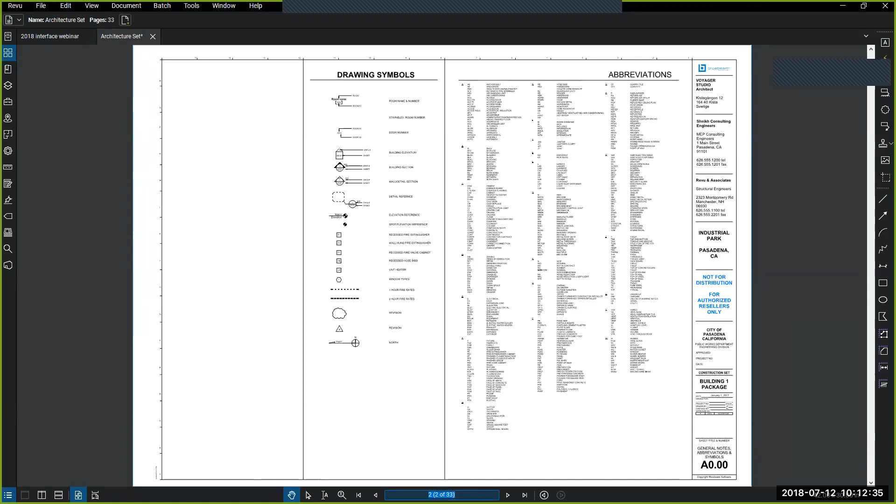And I'll go back to page 5 by clicking in the middle of the page field and hit the number 5 and hit enter. And not only does it tell me what page I'm on, but it also tells me how many pages there are total in the document. The left and right arrow buttons here allow me to go to a previous page or next page.

And this button here, this is kind of an interesting button that not a lot of people know about. By clicking on this button, this will take you back to the last thing that you are looking at. So this is very useful if you have hyperlinks in your document and you want to navigate to the last thing you clicked from after you made your hyperlink jump. Just look for the previous view button and it will take you to the last thing that you were looking at.

Now, this is not too different from the earlier version, 2017, but I wanted to throw this in there because not a lot of people use the navigation bar. And I just want to point out that it is another bar as part of our bar navigation overview.

Now I'm going to move on over here to the panel bar. Now what's the panel bar? The panel bar is a new feature in 2018. And if you're a longtime Bluebeam Revu user, you probably know that there used to be a big orange upside down triangle in the upper left representing a drop-down menu that would allow us to select side panels like our thumbnails or our bookmarks. And so there is no more big orange triangle in the upper left.

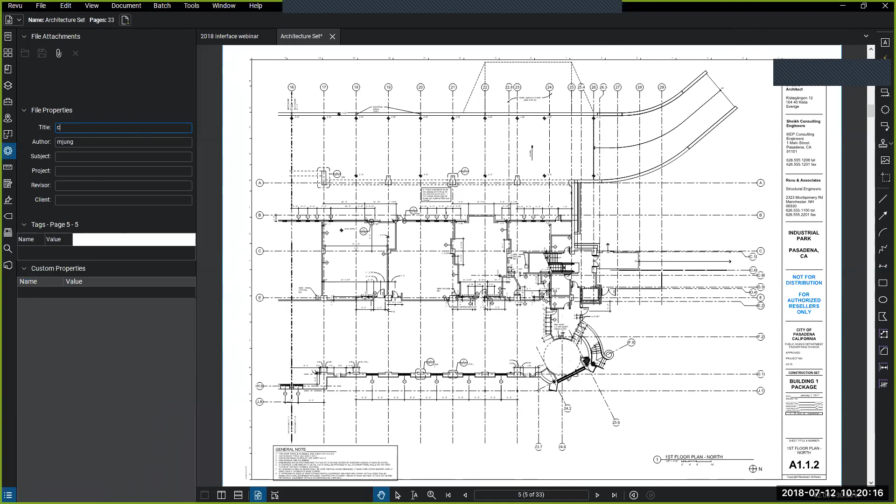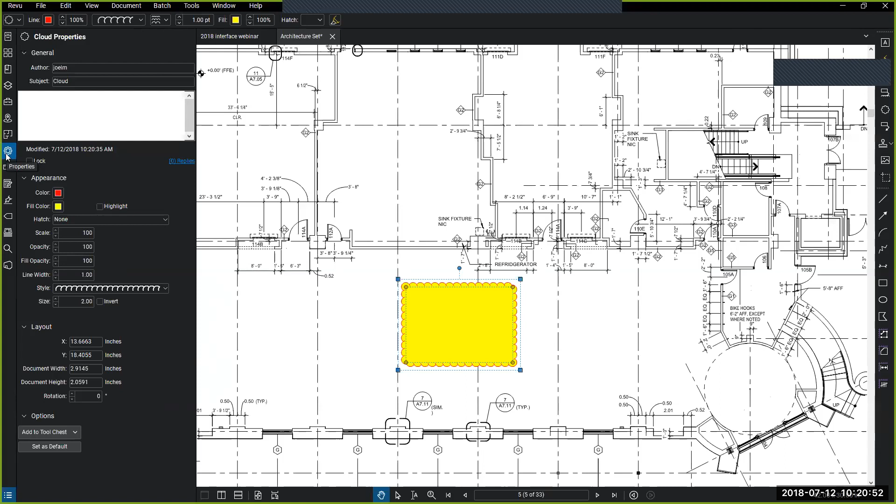And this is actually a very useful panel because it allows us to control the properties of certain things like our markups. So when I select the markup on page, the properties panel appears, allowing me to change its properties. And this is a very useful thing to have, but as you can see, it takes up a whole lot of space over here. So instead of using the properties panel that takes up so much space, we can use the properties bar, and that's what we see up here at the very top.

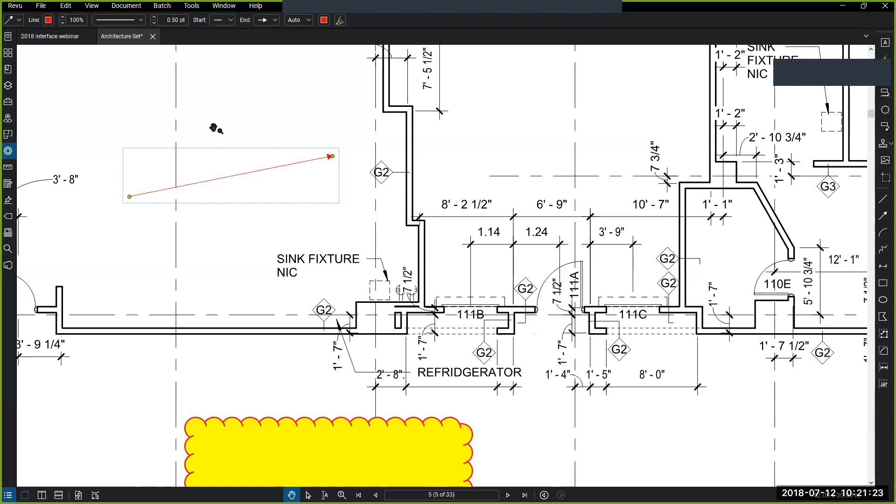So let me start out with another markup, something really simple like the arrow tool. So if I click on the arrow tool and apply an arrow to the page, I can see that when it is selected, my properties bar dynamically changes to give me the most pertinent properties that I can use to change the arrow. So if I want it to be thicker, I can just go up here and make it a little thicker like so. If I want to give it a different color, I can do that as well.

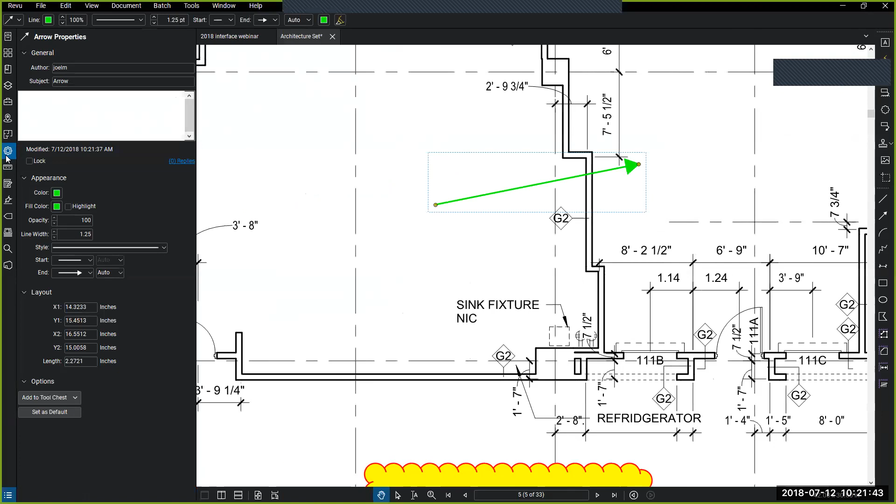So these are all features that I would normally have to modify by going to the properties panel and changing these features over here. But as we can see, by closing down the properties panel, we now have a lot more room. Now, again, the properties bar changes dynamically based on the selection. So right now I have arrow properties selected, but if I choose this cloud that I created earlier, I'll click on it, and now I have cloud properties.

If I deselect all of these features by clicking in the background, now I have properties that are related to the page or the document itself. So I can look here in the properties bar, and it tells me that there are 33 pages in this document. Here's the name of the document. If I want to add a blank page after this current page, I can click on this button. And you'll also notice that there's a pull-down menu right here on the far left of the properties bar. And by clicking on it, it shows me what the document's properties are.

Now, similarly, if I click on the arrow tool and look at that pull-down menu, you can see that the icon that represents that menu has also changed. And by clicking on it, it allows me to change the general properties of the markup. So in other words, I can change its subject property instead of having to go to my properties tab and changing the properties from the properties panel.

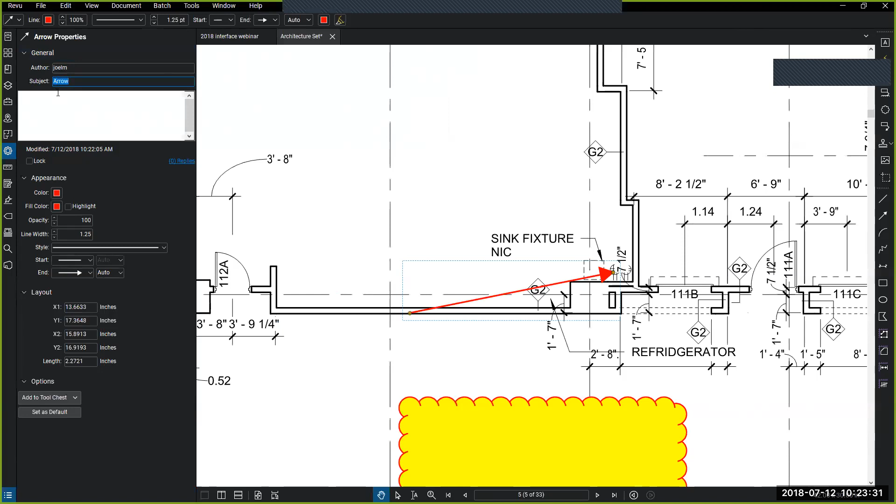Furthermore, once I change the properties to have it be something that I want to use going forward, so I'll change this to a green arrow, and then I'll go down to the pull-down menu. I can even assign it to a particular layer, or by setting it as the default, every time I use the arrow tool, it will retain those properties. Or I can even assign it to an existing tool chest or tool set that I've created from before. So these are really quick ways to add tools that you modify on the fly to a tool chest.

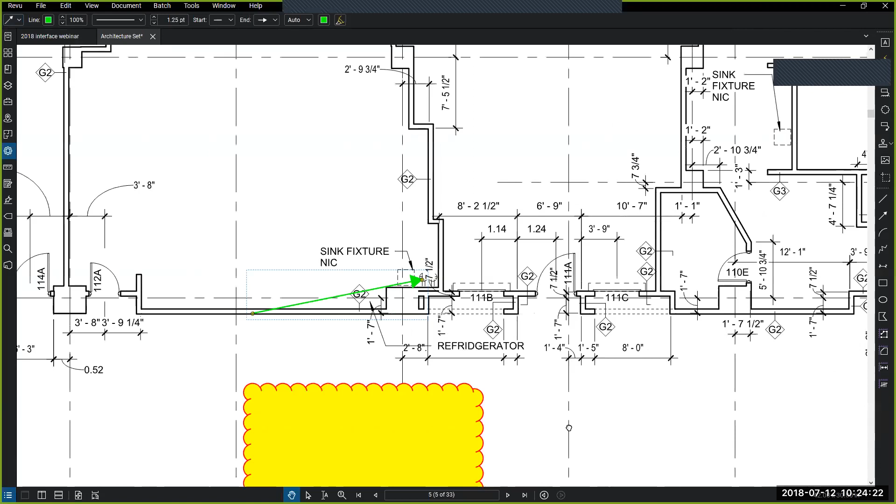Now let's take a look at this cloud tool. You can see how distinct it is from the arrow tool. We now have fill options that we can apply, so I can modify the inside of it, change its color, even change the opacity of this markup so we can see through the fill, or apply a hatch pattern to it.

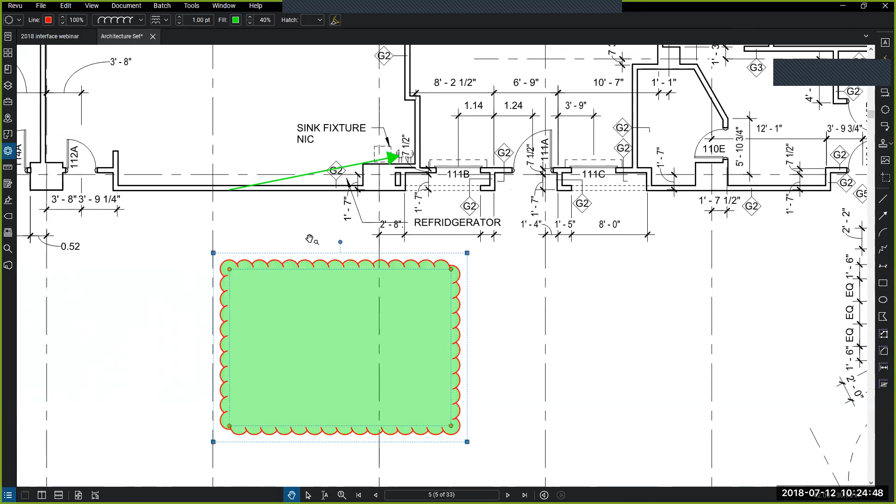Now, if I choose a different tool, something that has many more properties, an example of that would be the Cloud tool, or the Cloud Plus tool. So I'm going to choose the Cloud Plus tool right now, apply a cloud, and then position my text.

And there I have the Cloud Plus tool. You can see that the properties bar expands because ordinarily, if we want to modify the properties of a Cloud Plus tool, we go to the Properties panel, and we can see that we can modify the cloud separately from the text or callout portion of the tool.

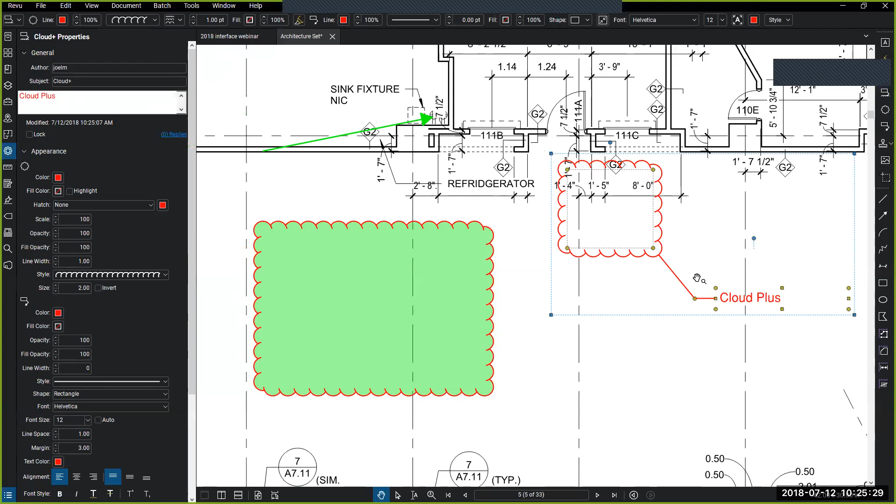Now let me close down the Properties panel, and you can see that we can do the same thing here. We can modify the cloud separately from the callout. So there's my cloud, and I haven't modified the callout yet.

I'm going to now assign a fill color to it separately from the cloud itself. So all of these things we can do from the Properties bar, and again, it just dynamically changes based on the tool that you have selected. So I prefer using this to the Properties panel for most of my property changes.

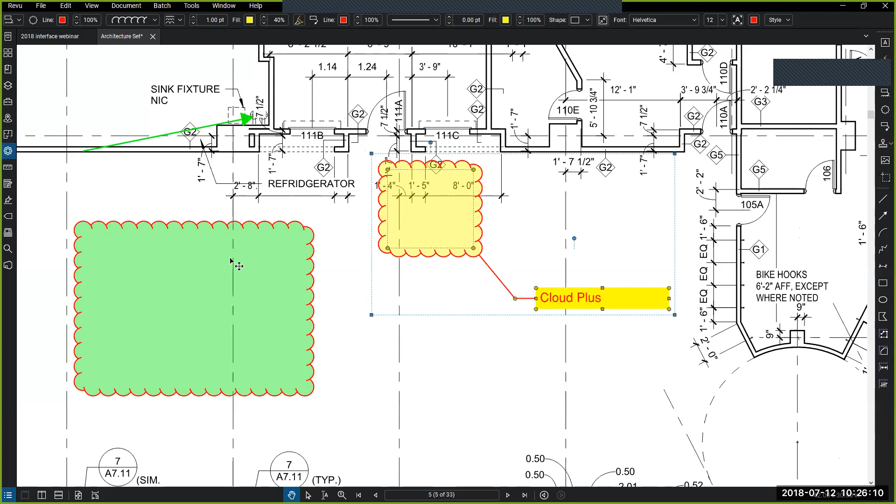And this is one of the significant new features that are in 2018, applying a Properties bar to a small sliver of the page, which still leaves us with a lot of room to operate in.

I'm going to show you one more thing here. Some of you may not know this particular feature, but I'm going to introduce it to you right now to prove another point about the Properties bar. If we open up by going to the window menu, if we go to the Web tab option here, this opens up a website or a web browser within Bluebeam Revu.

Now, this is one of those hidden features in the program that not a lot of people know about, but if you open up a web tab, it opens a web browser that just occupies another tab right here on your list of documents that you currently have open.

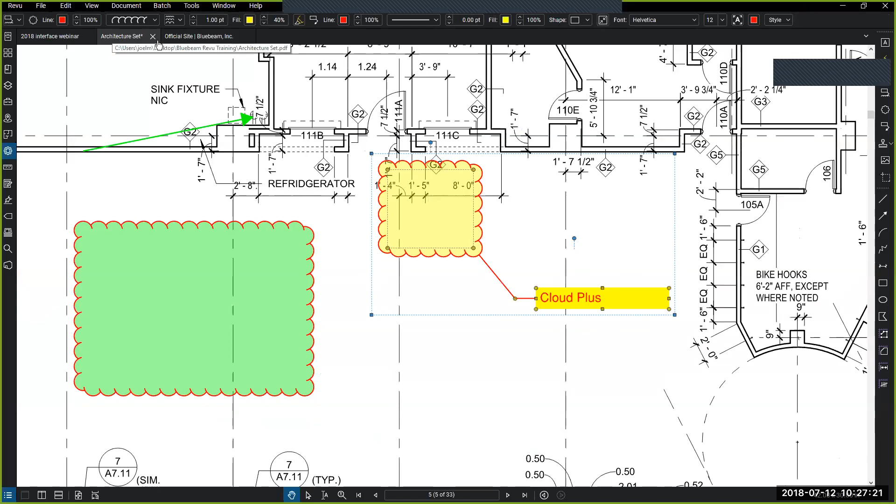So if I want to go back to my architecture file, I can click on it, but if I want to go to the web tab, I can click on that. Now, since this is a web page, you might be wondering, how do you navigate to a page that you want to go to? For that, you look up here at the Properties bar, and this is another example of the Properties bar changing dynamically based on what you have selected.

So within the context of the Properties, or within the context of the Web tab, we now have an address bar here, and I can choose a website to go to.

So the Properties bar is a very rich new feature, and I think it's probably one of the best features that were added to 2018. I do know that the new keyboard shortcuts programmability feature was something that people have been asking for the last 10 years, and it finally got implemented. So some people who've been asking for it every year for the last 10 years may find that to be a much better feature, but for my money, I think the Properties bar is really the best new feature in 2018.

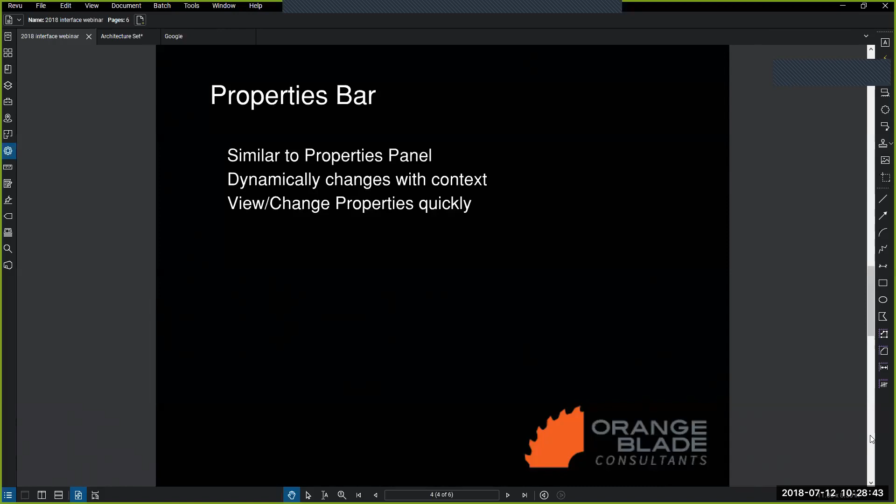Okay, so that brings us to the end of our webinar here today, but there is a lot more to talk about, and we really only hit the tip of the iceberg here in terms of the Revu program itself.